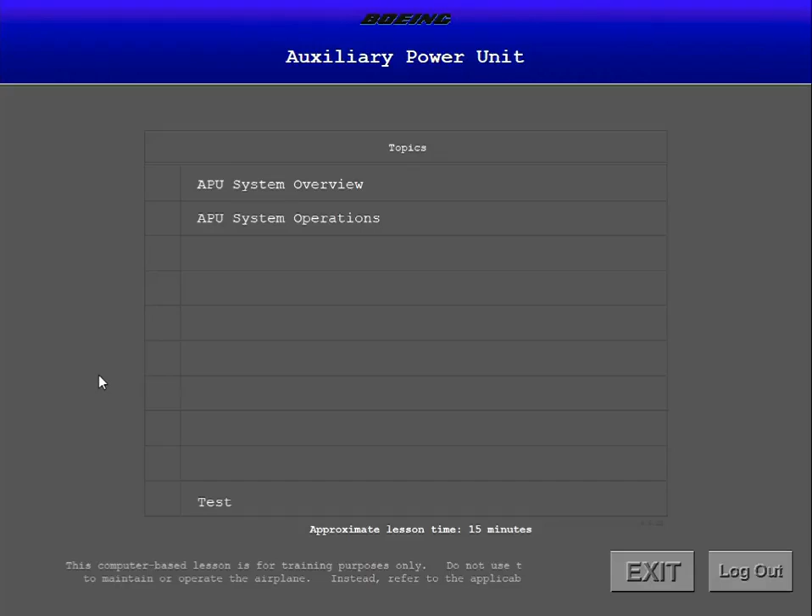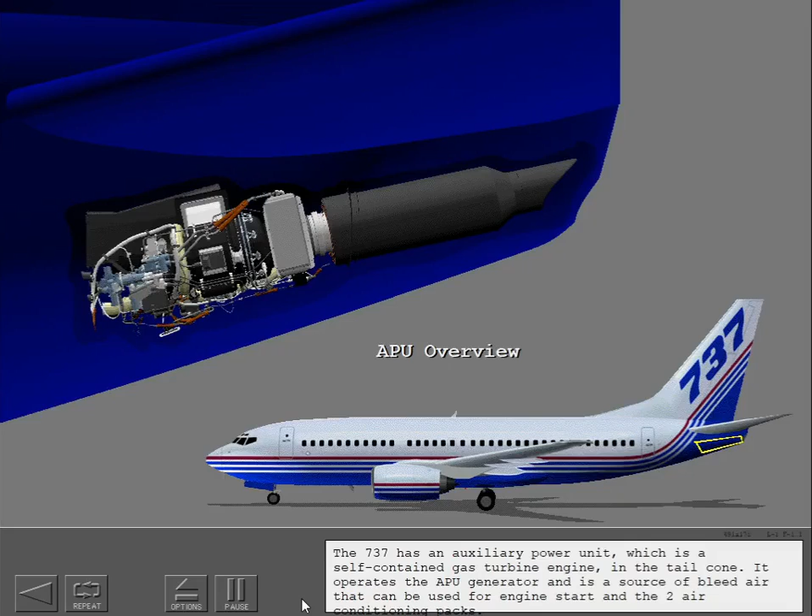The 737 has an auxiliary power unit, which is a self-contained gas turbine engine in the tail cone. It operates the APU generator and is a source of bleed air that can be used for engine start and the two air conditioning packs.

The APU inlet is on the right side of the tail cone. The exhaust is through the tail.

An electronic control unit controls and monitors the APU operation. The APU automatically stops for a dangerous condition. The APU automatically controls the duct pressure for the engine start and air conditioning.

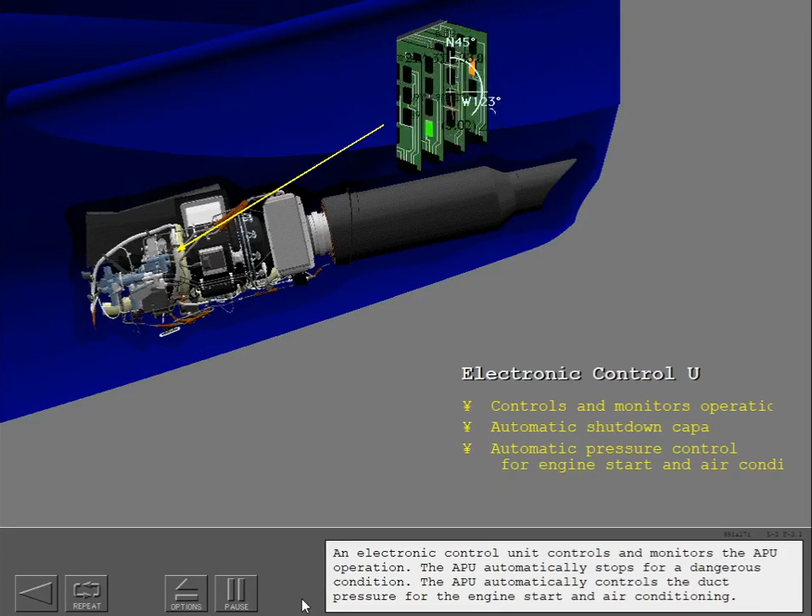The APU can be started and operated up to the airplane's maximum altitude. The APU can supply electrical power to the two transfer buses. The APU can only supply bleed air up to 17,000 feet. Both electrical power and bleed air are available up to 10,000 feet.

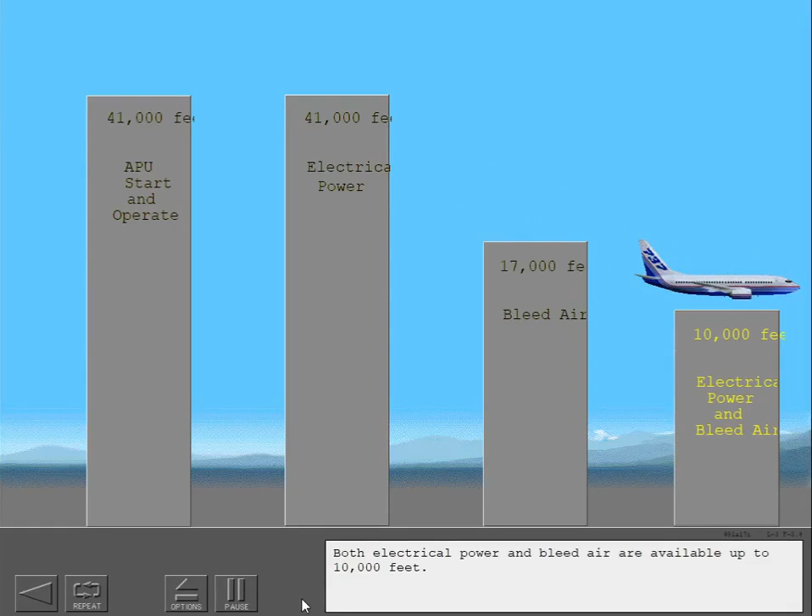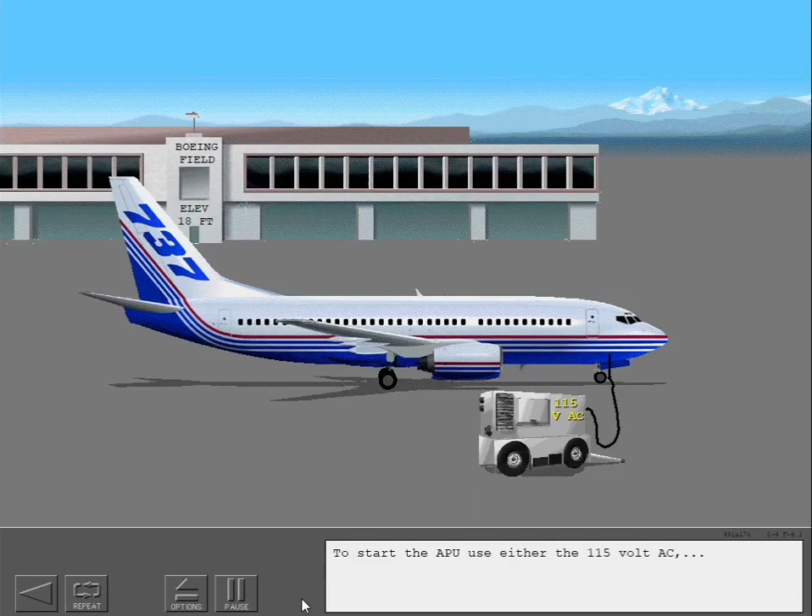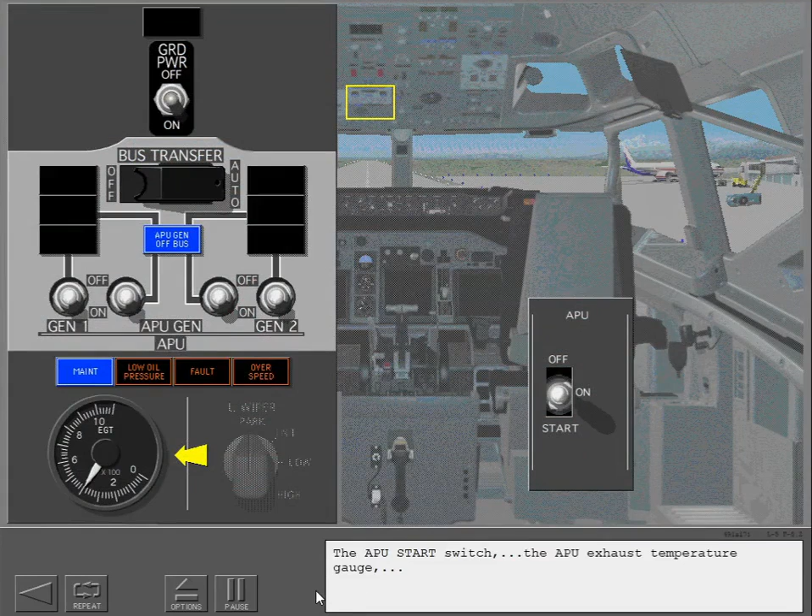To start the APU, use either the 115-volt AC or the 28-volt DC power. The APU start switch, the APU exhaust temperature gauge, the APU status lights, and the APU generator off bus light are on the forward overhead panel.

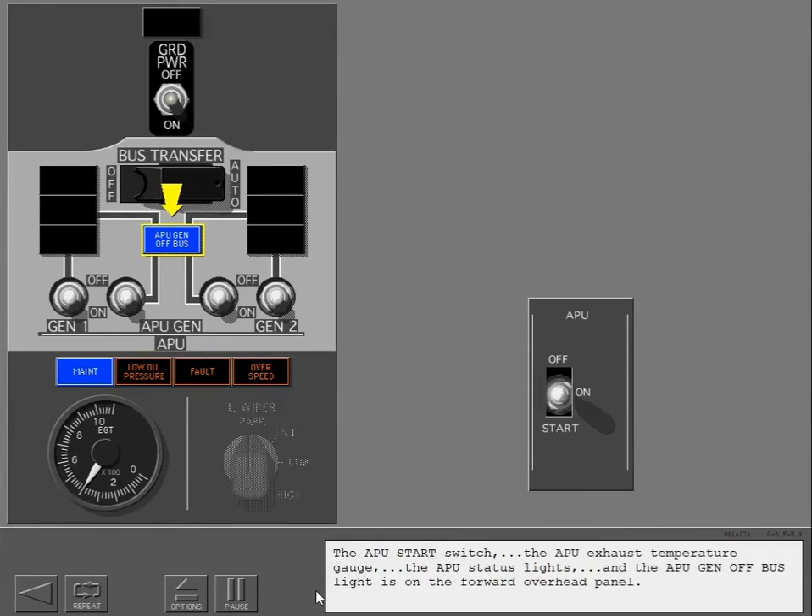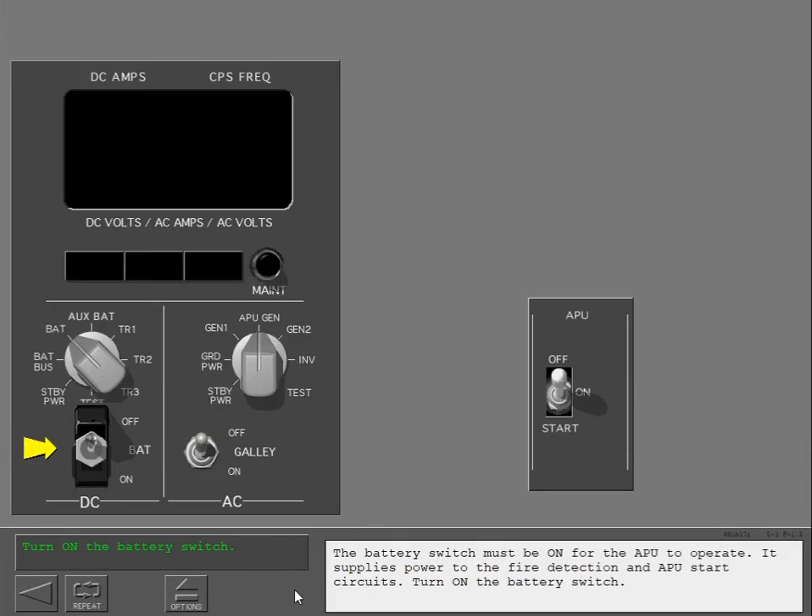Let us start the APU with the battery. The battery switch must be on for the APU to operate. It supplies power to the fire detection and APU start circuits. Turn on the battery switch. Move the APU switch to start, pause momentarily, and then release the switch to on.

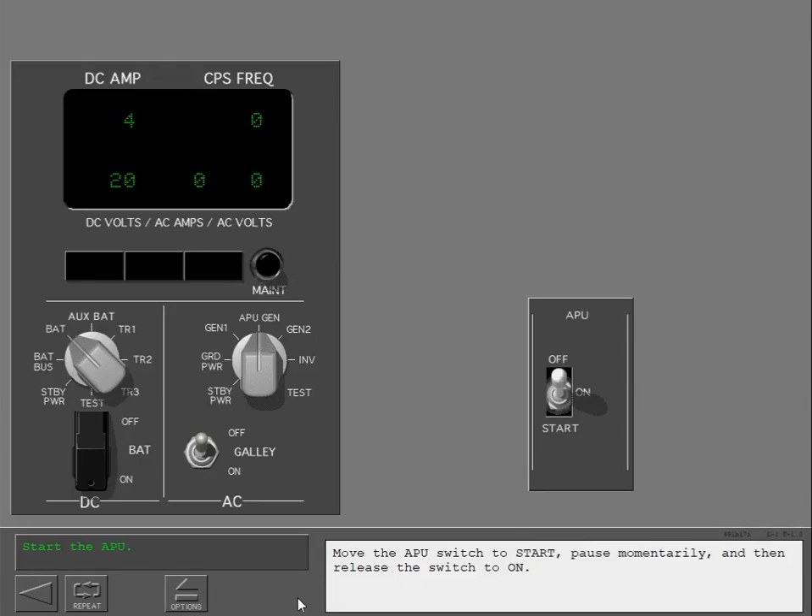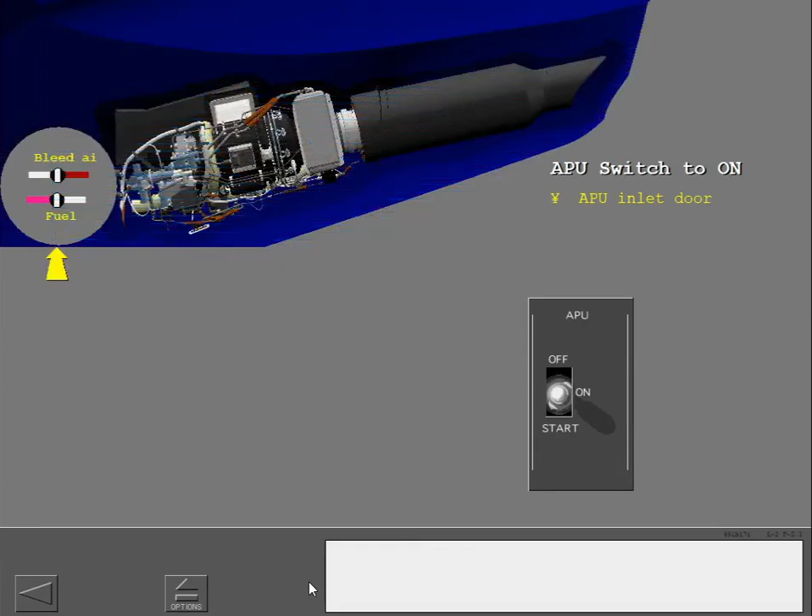The APU inlet door opens. The APU fuel shutoff valve opens and fuel from main tank number 1 flows to the APU.

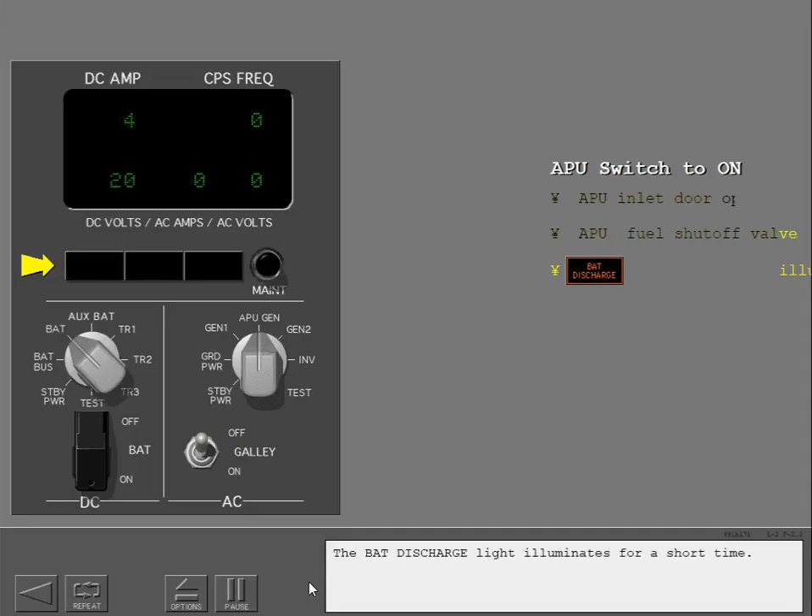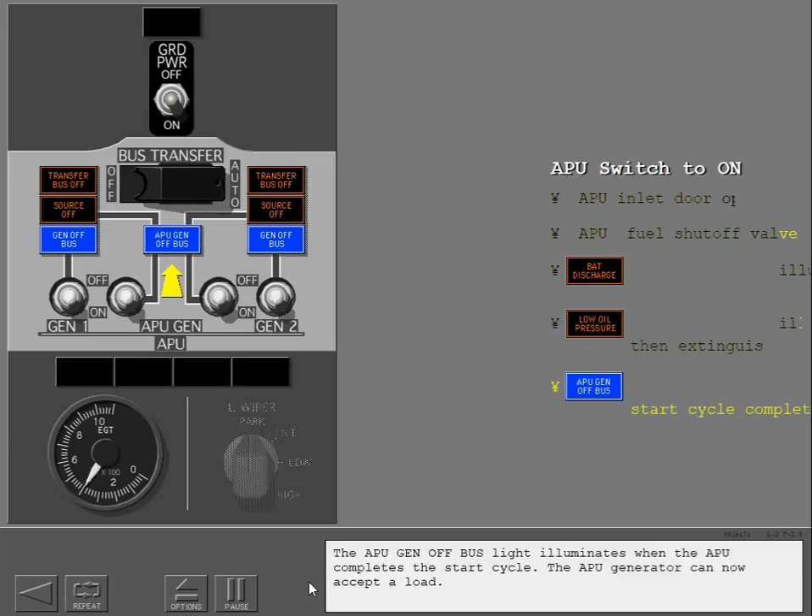The battery discharge light illuminates for a short time. The APU low oil pressure light illuminates until the pressure is within limits, then extinguishes. The APU generator off bus light illuminates when the APU completes the start cycle. The APU generator can now accept a load.

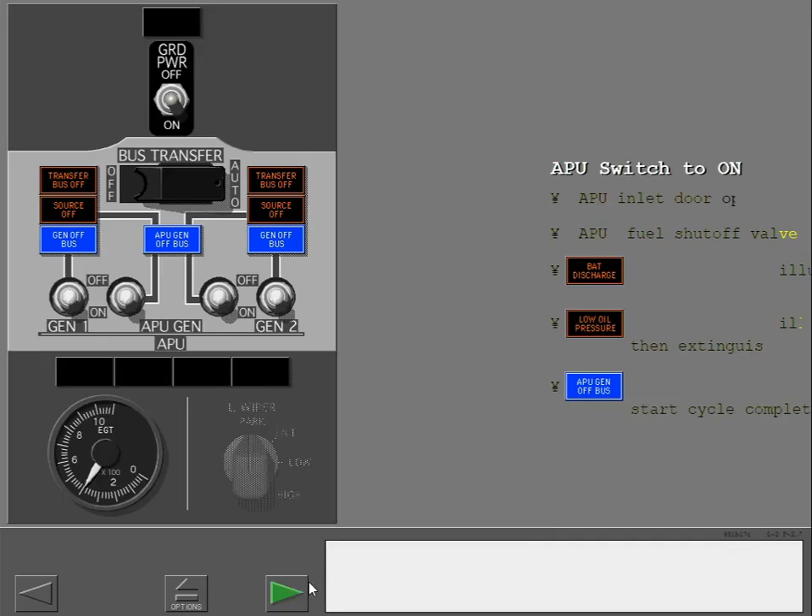The APU is normally turned off before taxi, but it can stay on if you will use it during takeoff. Turn off the APU.

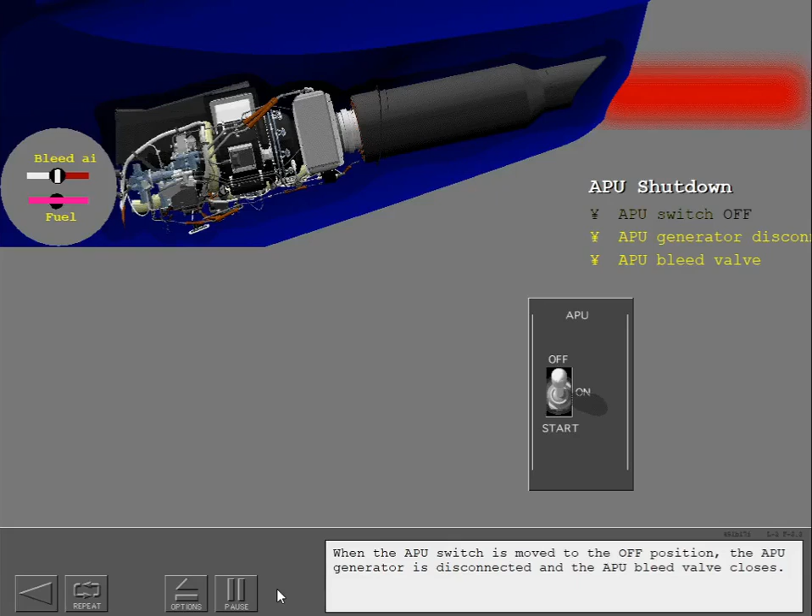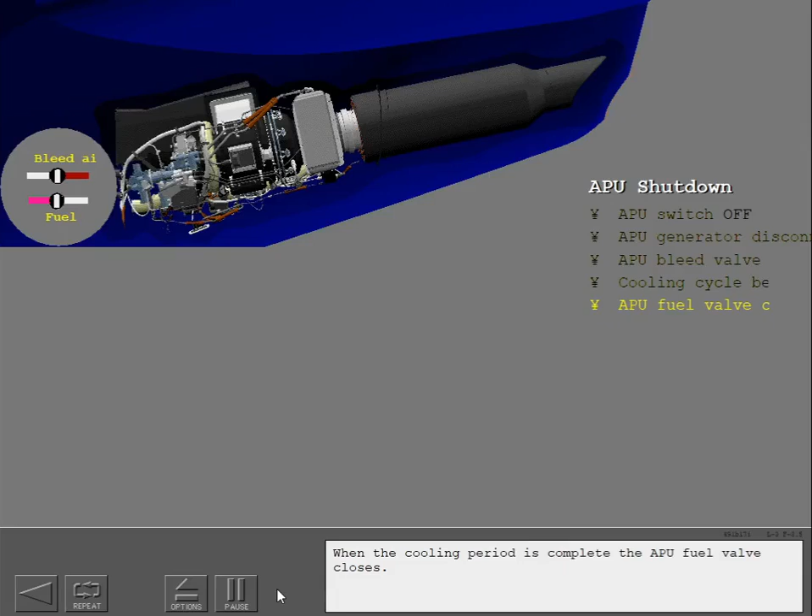When the APU switch is moved to the off position, the APU generator is disconnected and the APU bleed valve closes. This starts a 60-second cooling period. When the cooling period is complete, the APU fuel valve closes. Last, the APU inlet door closes. This completes the APU shutdown sequence.

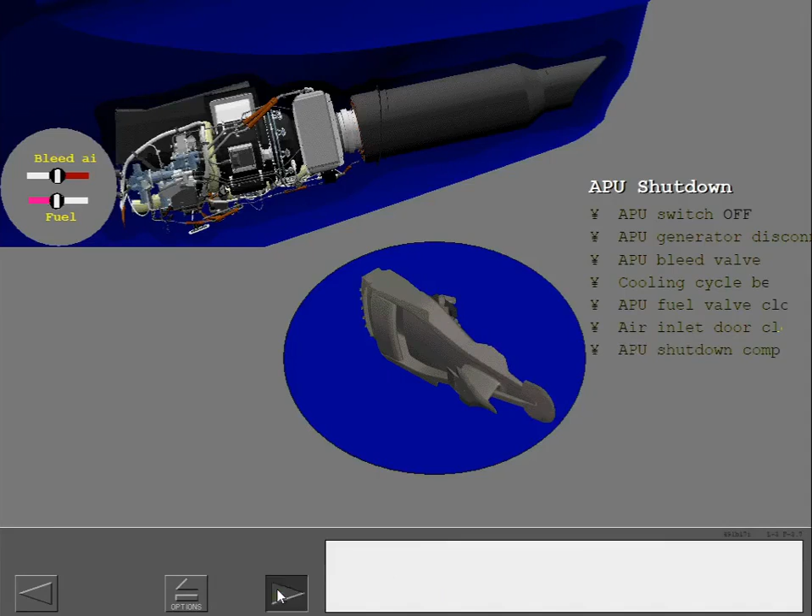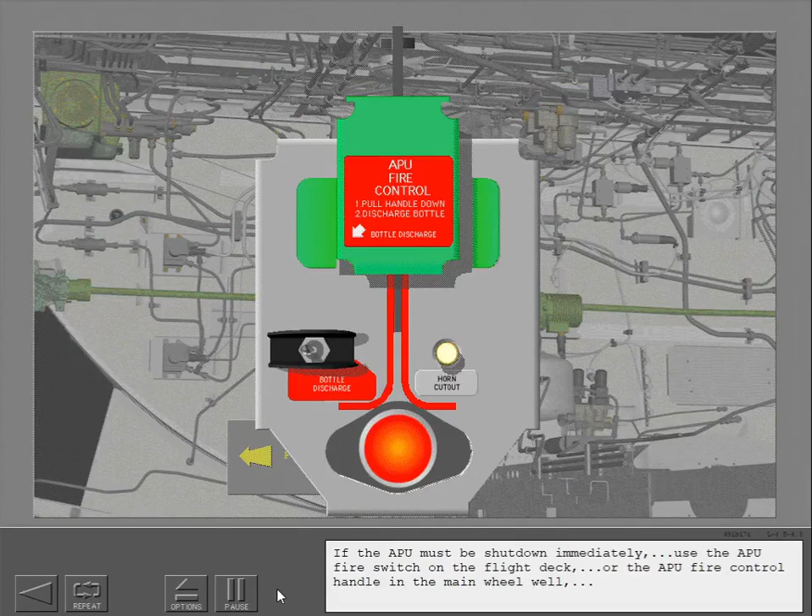If the APU must be shut down immediately, use the APU fire switch on the flight deck, or the APU fire control handle in the main wheel well, or turn off the battery switch.

These are the APU status and caution lights. The maintenance light illuminates when there is a maintenance problem. The APU can be operated. The light is disarmed when the APU switch is off.

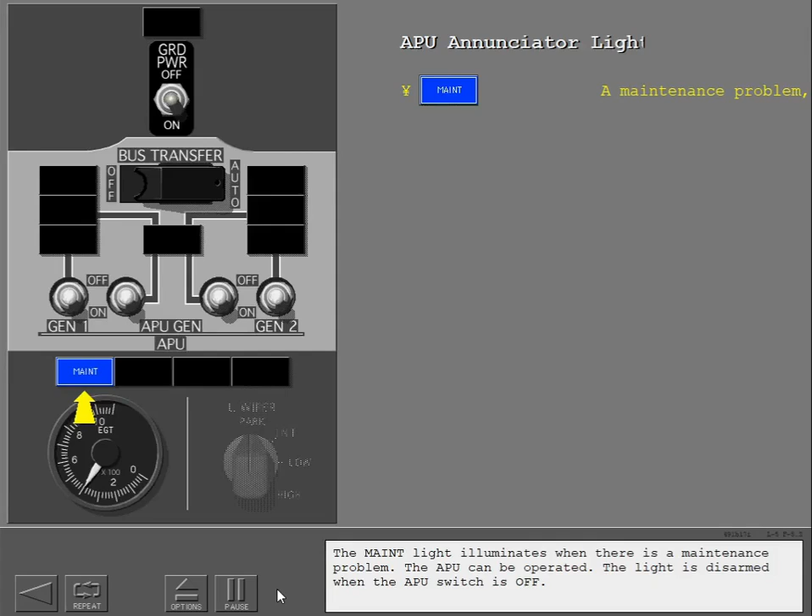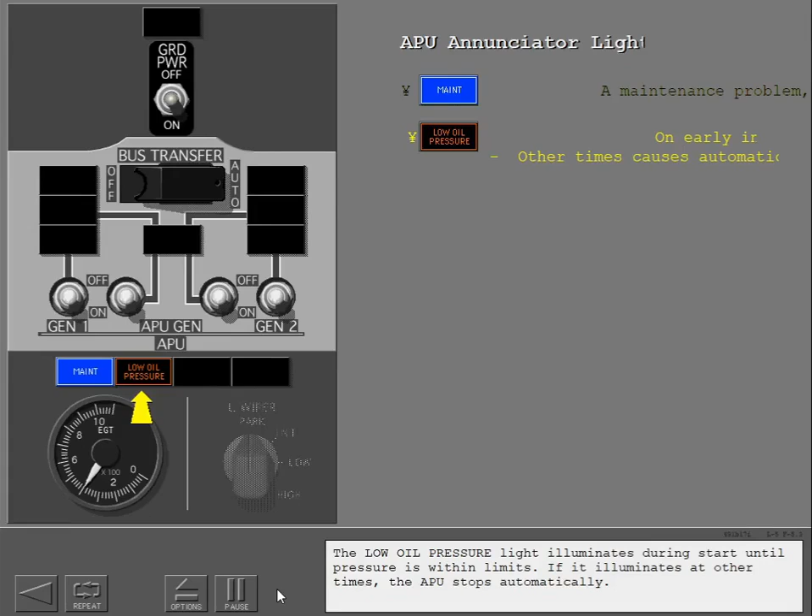The low oil pressure light illuminates during start until pressure is within limits. If it illuminates at other times, the APU stops automatically. If a fault is sensed, the APU automatically stops and the fault light is illuminated. The fault light also stays on if the APU fuel valve does not close after shutdown.

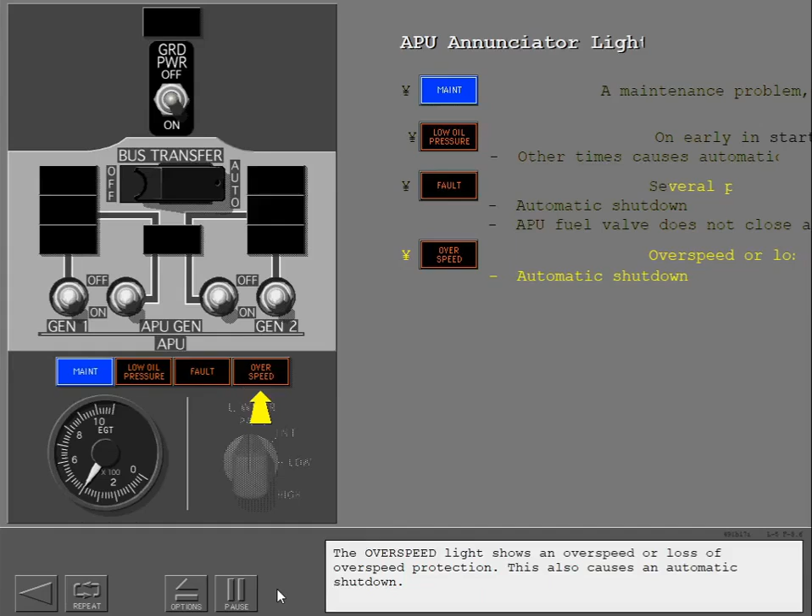The overspeed light shows an overspeed or loss of overspeed protection. This also causes an automatic shutdown. The APU generator off bus light shows that the APU is prepared for a load.

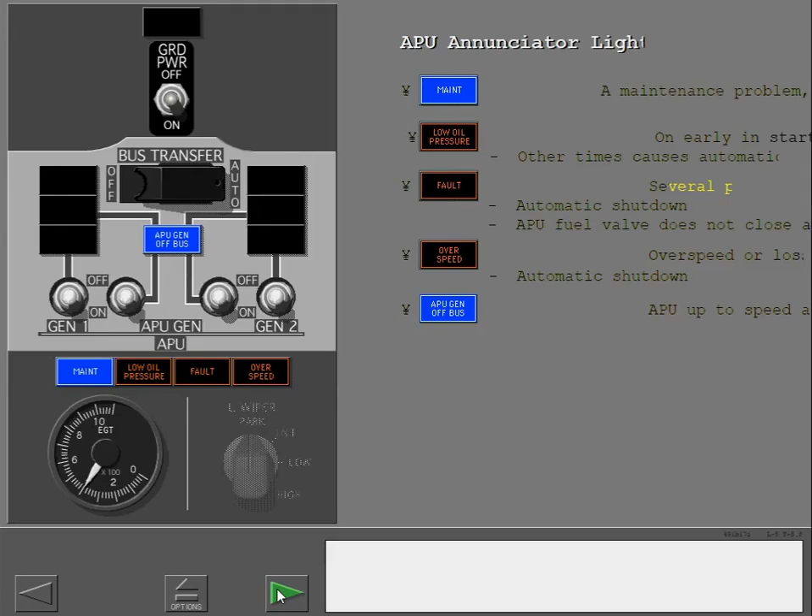In flight, the galley buses are automatically disconnected when the APU generator is the only source of electrical power. On the ground, the APU tries to energize all systems unless the load is too large.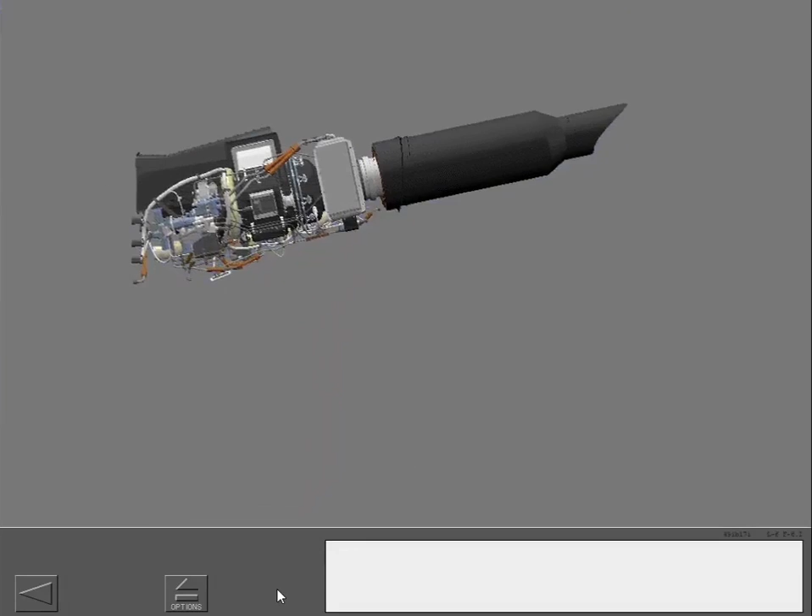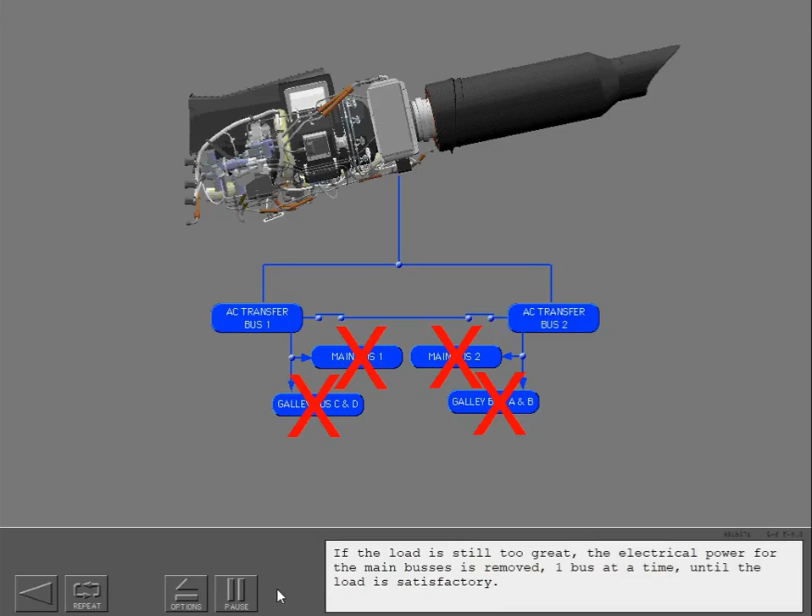The electrical load for the galleys is removed first. If the load is still too great, the electrical power for the main buses is removed, one bus at a time, until the load is satisfactory.

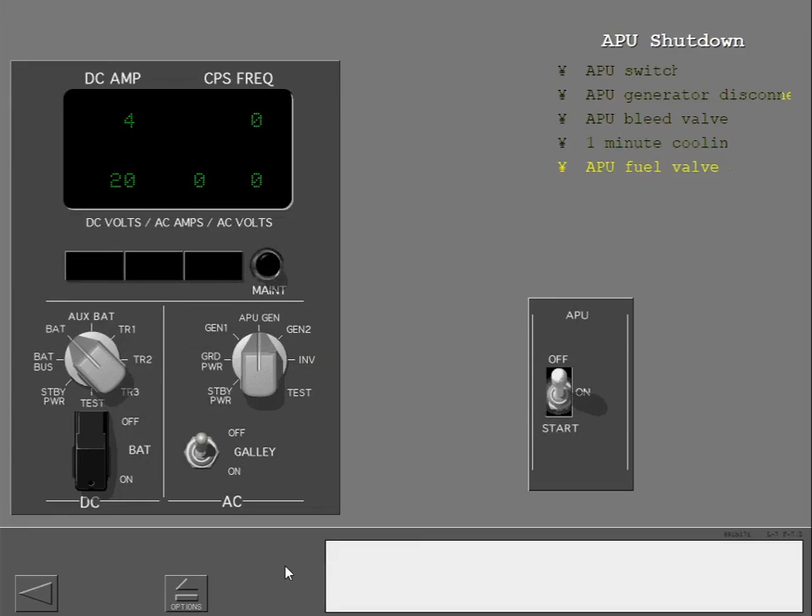Secure the APU. Wait 20 seconds after the APU generator off bus light extinguishes to let the APU inlet door close before you turn off the battery. Turn off the battery switch.